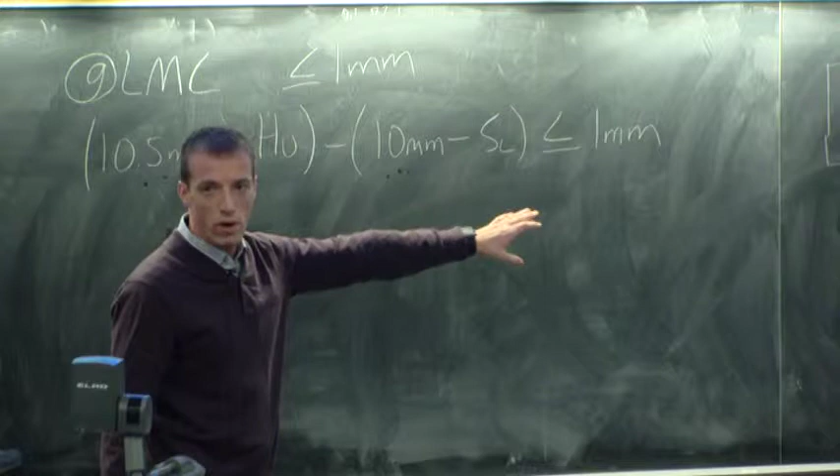So I'll say my 10.5 millimeters for my hole, plus the upper tolerance of the hole, that size minus my 10 millimeters for my shaft, minus the lower tolerance, should be less than or equal to 1. Here's my hole as big as it can get, subtract that by my shaft as big as it can get, and it should be less than 1. That'll satisfy my condition. So again, I'll have 0.5 millimeter

plus HU plus SL is less than or equal to 1. So I can say HU plus SL should be equal to half. In this case, again, I have one equation but two variables, so this time I'll just say we can split them. We can let HU equal 1/4, and that will let SL also be 1/4.

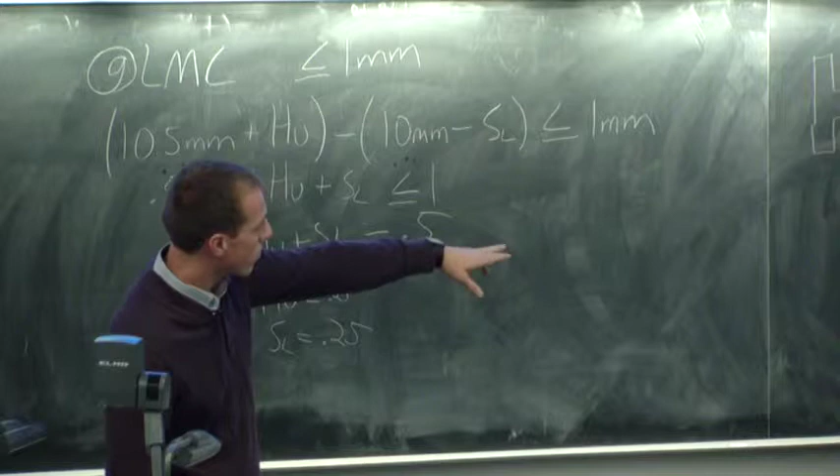So I can go back and check them again. If I let my shaft lower be 0.25, then my shaft would be 9.75. And if I let my HU be 0.25, that's 10.75, subtract those and I get 1. So that's my boundary case, right?

It's not very complex when you have something like this, but if we look at the Lego example, let's say we have just a 4-brick Lego, and you have this one and a negative of this one as you're putting them together. Now you need these 4 to have the distances correct and the radiuses correct on all connections. So your geometry, even though it's still simple, you have a lot of things to line up now. This is where gauges come into good use.

Instead of going through and checking every one of those dimensions on these parts with a pair of calipers, you can create a functional gauge where you can just stick the brick in. If it sticks, it works. If it doesn't stick, it doesn't work. You can put those gauges on the boundary conditions to check them just with a simple functional check. Does that make sense to everybody? It's a lot simpler than individual inspection methods.

But those are some of the really widely used means of checking tolerances. Does anybody have any questions on all of that? Okay. Geometry, pretty simple.

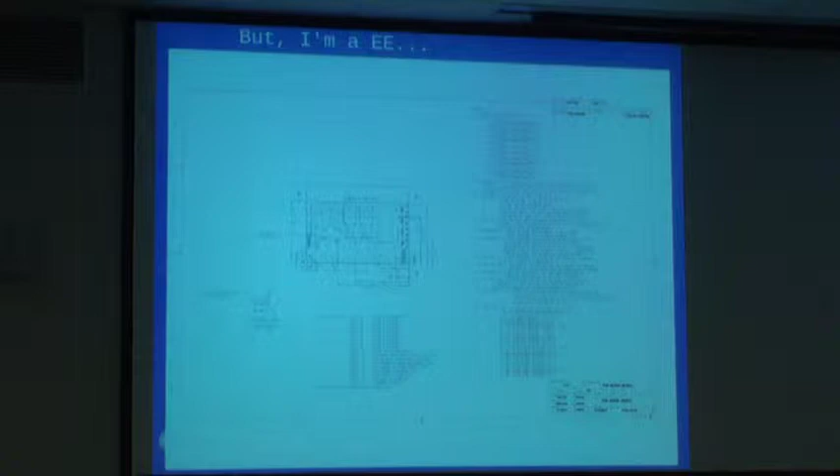Oh no, I lost my audio.

Okay, so while prints and tolerance analysis may not be the most interesting subject, I want you all to become master builders, and it's a step along the way. So you now have a print and you have tolerancing, but it's still just the beginning. Now you have your part specified and you want the part to be made. So a few things that you need.

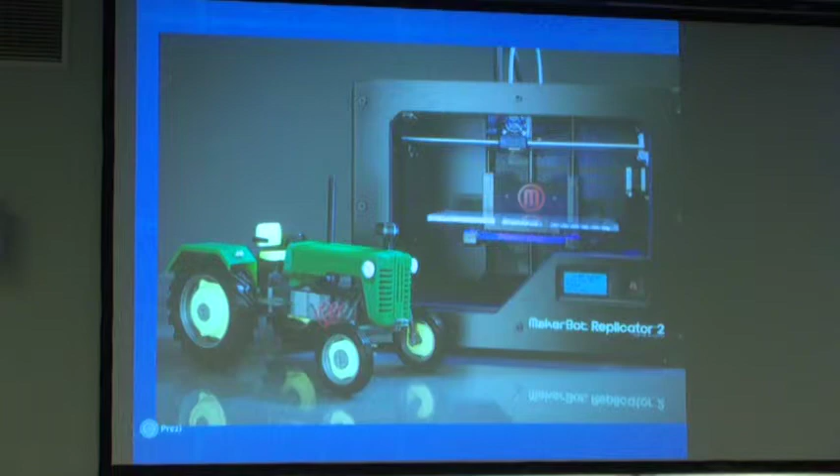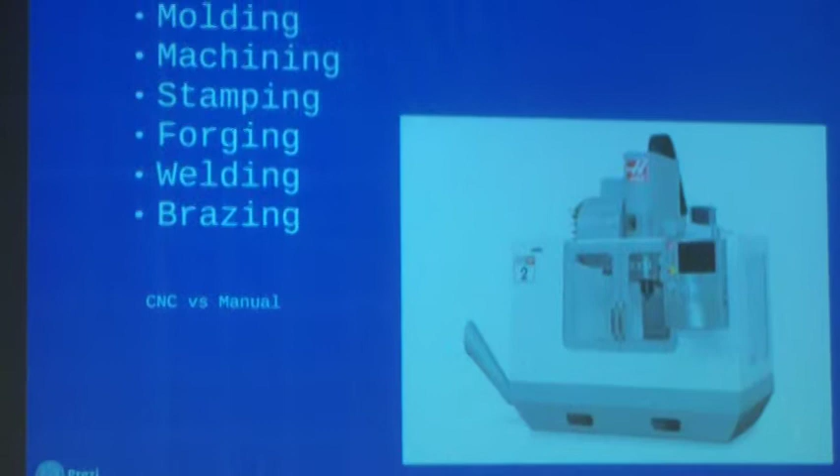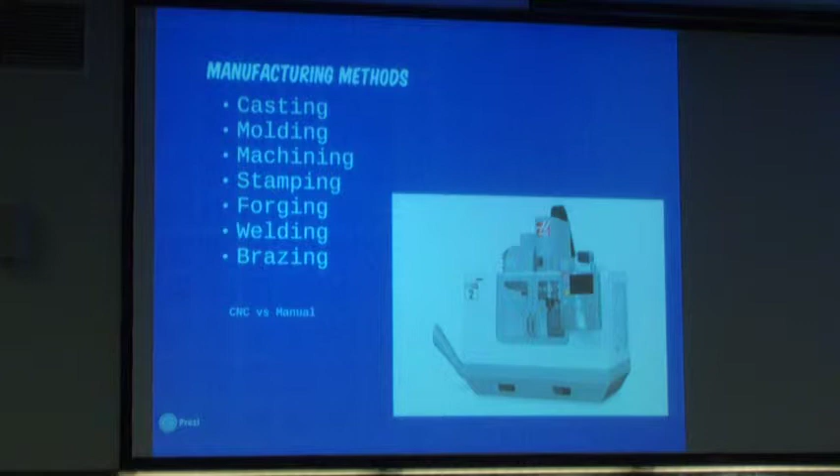In industry, we don't 3D print much. You might make a rough prototype just to check size and feel, things like that, but this isn't how parts are made. Parts are made through things like casting, molding, machining, stamping, forging, welding, and brazing, amongst a lot of other things. These are mechanically oriented, but any discipline would have its set of traditional manufacturing methods good for making mass-produced parts.

Casting is a method of getting an overall shape, usually in a piece of metal. You'll have a mold, you put molten metal into it and you get out a shape. There are several different kinds of casting. Molding is usually associated with plastic, so those Legos are molded—I think they use injection molding for those. Machining is a method where you take a block of material; it's subtractive, cutting out material to create an end shape. If you've been down in AFL, most of what you do there is machining.

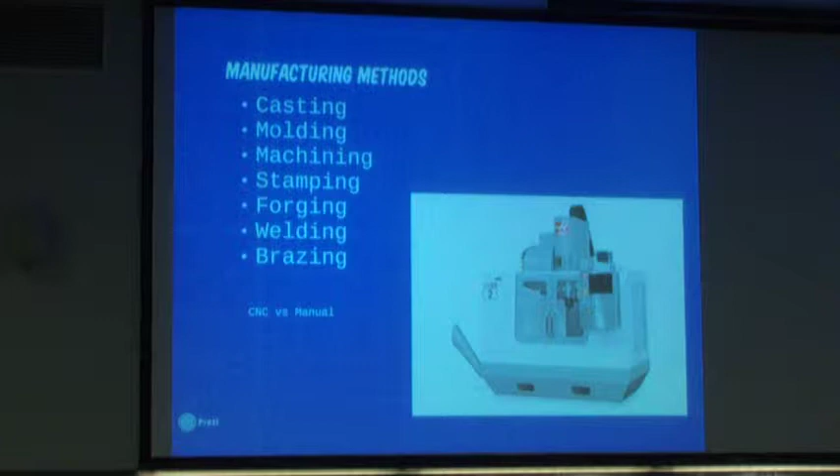Stamping is a method of shaping metal with a large press that goes over a mold—old auto bodies were stamped before they were plastic. I don't know if they still are. Forging, welding, and brazing are some other manufacturing methods, so these are some ways real parts are actually made. Not to take anything away from 3D printing—I love 3D printing—but be aware that making a part in college using a 3D printer is not the same as manufacturing a part.

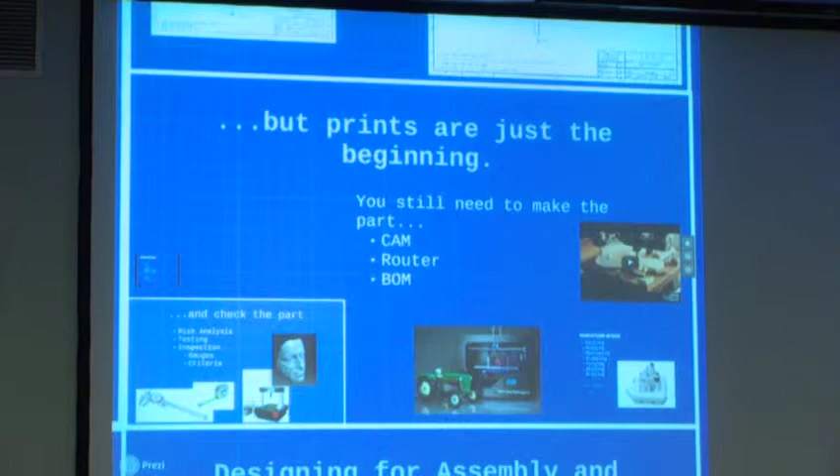I'll give you 5 seconds of it because it's kind of neat. Or maybe I won't, I skipped it. Can you do it? No?

Okay, so then you've made a part. I'm sorry, I'm running short on time. Then you want to check the part—we talked a little bit about tolerancing, and there are a number of ways to check parts.

Some of the most simple ones: if it's 10 feet long and I'm doing woodworking, building some bookshelves, I'm going to use this guy, a tape measure. So I don't care about my tolerance more than say a 1/16 of an inch—this is a great tool to use.

If I want more precision, I might use calipers, or even micrometers, which do even smaller increments—down into 1,000th of an inch, which is pretty precise. If you're ever making a part less than 1/1000th of an inch, you're either in a really specialized industry, like precision valves or space shuttle work, or you're doing it wrong. Most parts are going to be around that range at the smallest end, but you can make some very precise parts that way.

Getting beyond the individual part, if I'm measuring this shaft, a set of calipers would work really well.

I can just clamp around the shaft and know how big it is. But if I'm doing something more complicated, like the body of a car that has a lot of geometry to it, I'm not going to measure it that way. I might use something like a CMM, although that would be a very big application for a CMM.

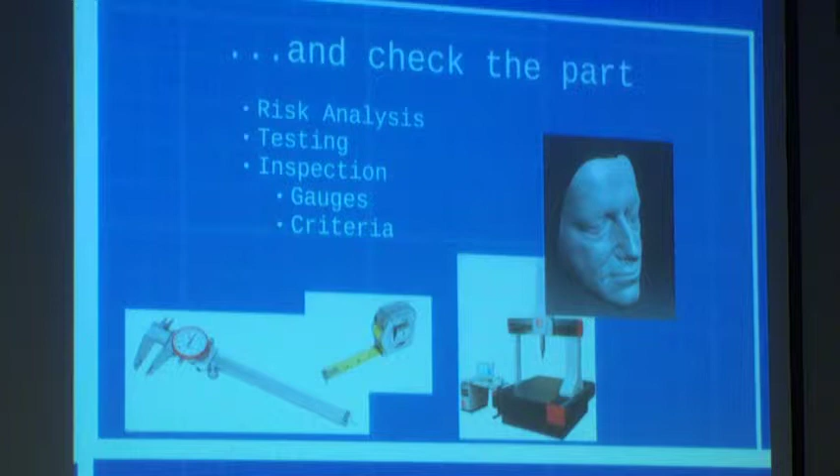So, some engineering roles. I mentioned that nobody in industry hires mechanical engineers. These are just a few of the very common engineering professions or roles you'd have on a design team. Beyond the design process, there are many more - you have process engineers and things like that that do industrial engineering type jobs. But some of the core ones you'll see pretty much everywhere are design engineers, and really their job is to make prints.

You're going to work with the customer, do the kind of things you guys are used to doing in EPICS. You meet with your partner, your community partner, your customer in industry, ask what do you need, come up with the ideas. You get to do a lot of the creative work. This is what I did in industry, and it's a lot of fun.

But once you have those, then you get into manufacturing engineers. Their job is to make parts - they're not the operator who's making the part, but they create the structure for that. So they might do those CAM programs, things like that - looking at tooling, machine programs, training operators, things like that. There are a lot of engineers in these roles.

And then lastly, quality engineers - when we just talked about checking parts, that's their role. These people work together very closely because the design engineer wants to make sure the part is made correctly, and works with the quality engineer on how to do that because they have a lot of expertise. In design teams, these people interact a lot. Just because you're a quality engineer doesn't mean you don't have input into the design - you do, because you want a design that can be checked, that you can verify as a good part.

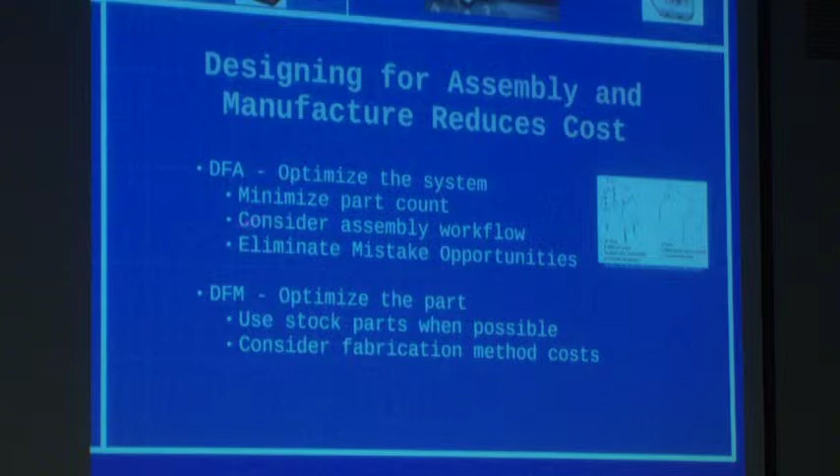This idea of design for manufacture comes from thinking up front about how we can make this part so it can be manufactured well and cost-effectively. You're looking at things like minimizing part count. Design for manufacture is making that one piece, and design for assembly is putting them together, but they're both for the same purpose: minimizing part count, thinking about your assembly workflow, and minimizing the chances for errors.

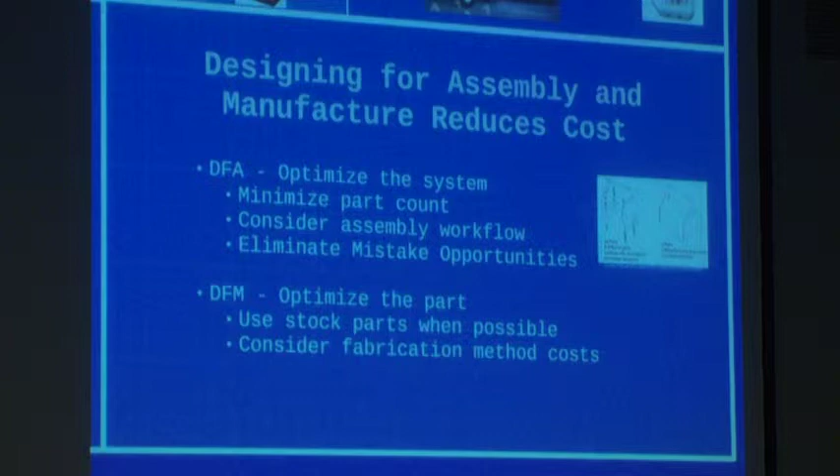My handle here had a lead-in on one side, a chamfer on one side, and not on the other, giving you a visual indicator of which side to put it in. But you could still put it on backward. I could have designed it in a way that prevents that, like with a key-in. When you're doing thousands and thousands of parts, being able to assemble quickly without thought, so you can't do it wrong, is really important.

And it saves a lot of money and time. Design for manufacture, you think about using stock parts. If you can buy a screw instead of making a screw, it's really cost effective, because it might cost you 2 cents to buy it and $12 to make one.

I actually did that wrong myself. I think my first year as an engineer, I was designing a set of instruments for revision knee surgery—you've had a knee surgery, taken it out, and you're putting a new one in. We had a thread that had an English thread with a metric head. There was no reason to do that; it was just inexperience, and no one on our team caught it. So we ended up making these $6 screws when we could have bought them for 10 cents if we'd just switched the thread. Those mistakes happen—learn from other people's mistakes.

So for design for assembly and manufacture, get those manufacturing people in early on in the process and respect their opinions, because they will be able to help you avoid things like that.

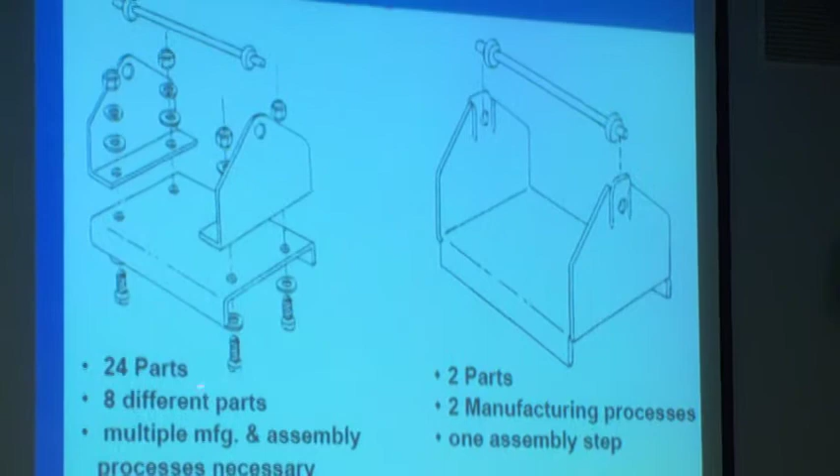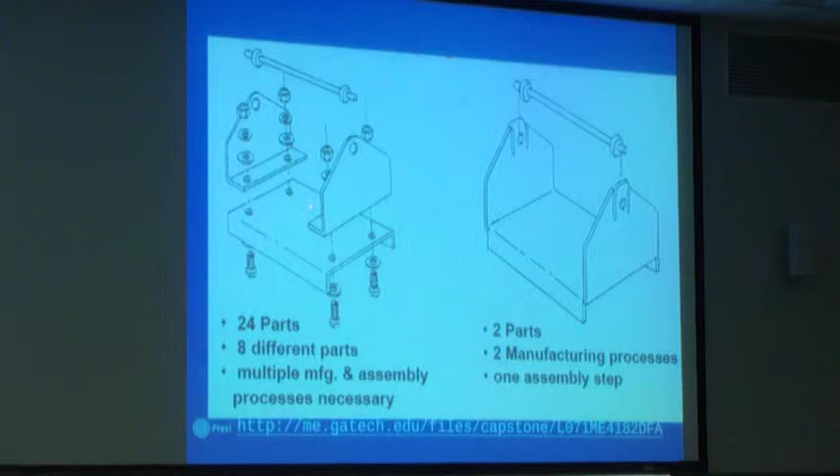I know I'm out of time, so a quick example: this is designed for assembly and this one is not. If you came in with this design, there's nothing the manufacturing person can do to make it any cheaper. But if you'd talked to them up front, they may have told you that you could make it like this with a bending process, and now this thing assembles in one step. So this part would be a lot cheaper in the long run than this part, even though this may have been more straightforward to design.

So say if you're doing casting, and you've designed a part that can be cast, that part might cost $1 a piece. But if you design that part so it couldn't be cast from the very beginning, and you have to machine it instead, it might cost $50 a piece. There's nothing your manufacturing engineer can do to get that $49 back. So getting your manufacturing and quality people involved in the conceptual design phase can account for a 50% reduction in cost. Does that make sense to everybody?

So this is why we want to use the design for manufacturing idea. It won't matter too much in EPICS, but it's good to understand when you get through. So trust those people in those groups that you work with.

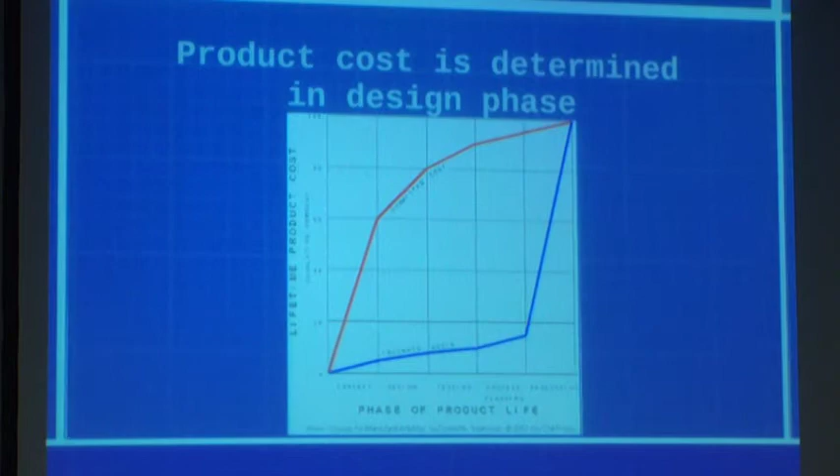We'll skip the exercise because we're out of time, but if you're bored, it's this one: try to put two pieces of Lego together. It'll be challenging, you'll get frustrated, you won't want to do it anymore. Then you can send me an email and tell me how frustrating it was, and I'll agree with you. That's kind of the point of the exercise—to see that it's hard.